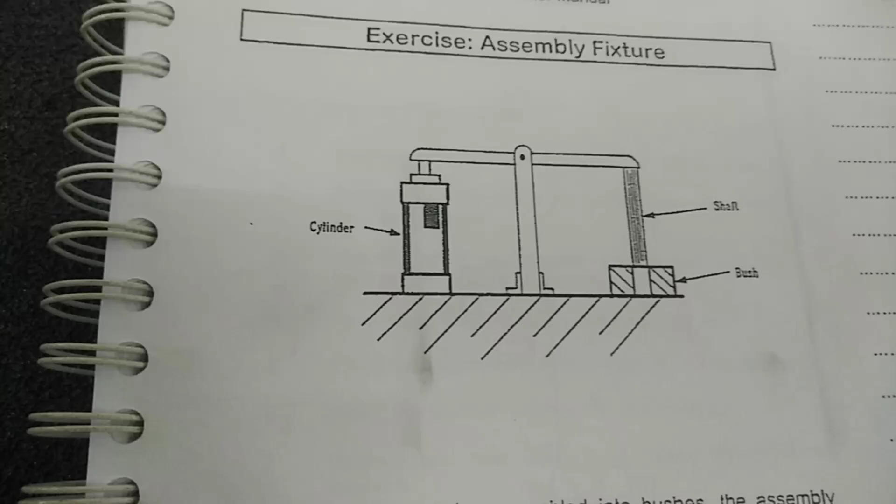This first experiment is about the use of a pneumatic control trainer for an assembly fixture. The purpose of this experiment is the insertion of spline shafts into the bushes.

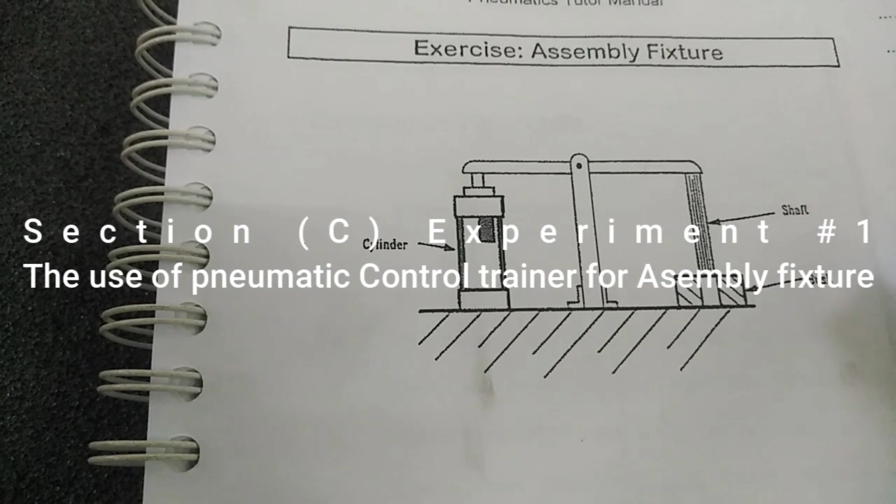This assembly requires a press fit. The meaning of this press fit is the case in which one part is forced under pressure into a slightly smaller hole in the other part. A spline shaft is a shaft in which a number of equally spaced grooves are cut into it.

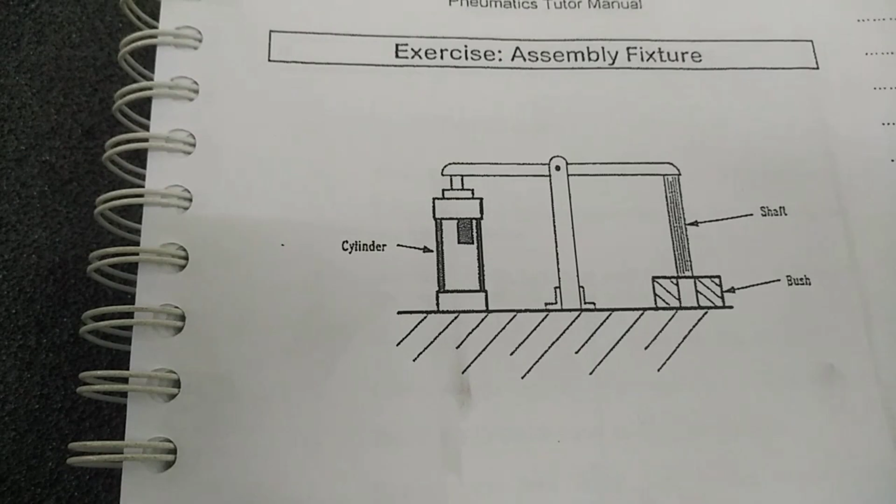For this purpose, these shafts are placed manually into the bush, and a push button is then actuated to extend a single acting cylinder through a linkage. As the cylinder extends, the shaft is pressed home. As the push button is released, the cylinder is retracted back to its initial position.

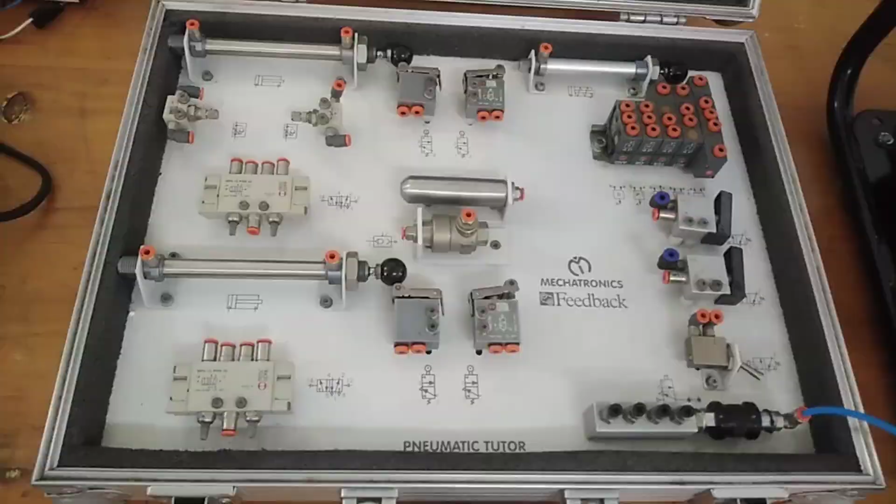To perform this experiment, we need one single acting cylinder, one 3x2 way push button operated spring return directional control valve, one port of the distribution manifold, and 4mm pneumatic tubings.

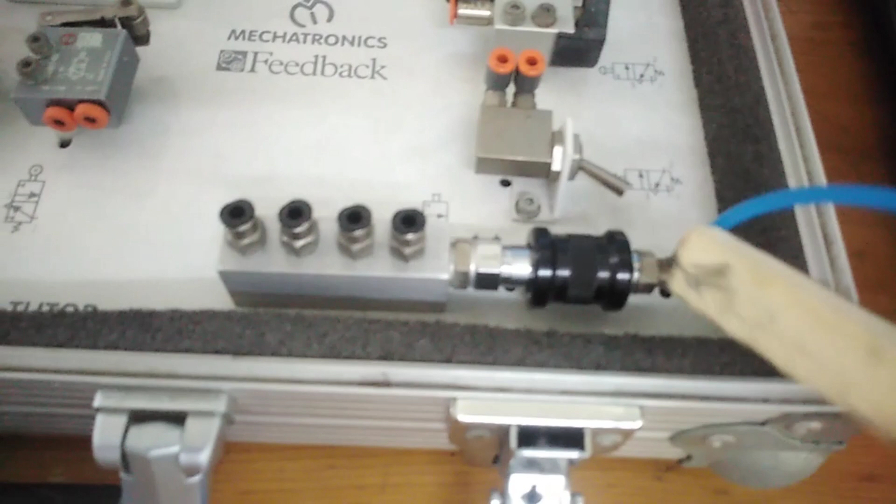First of all, ensure that the hand slide valve is in the off position. Then connect the tubes as per the circuit given in the experiment. Now perform the experiment as per the operational procedure given in the experiment.

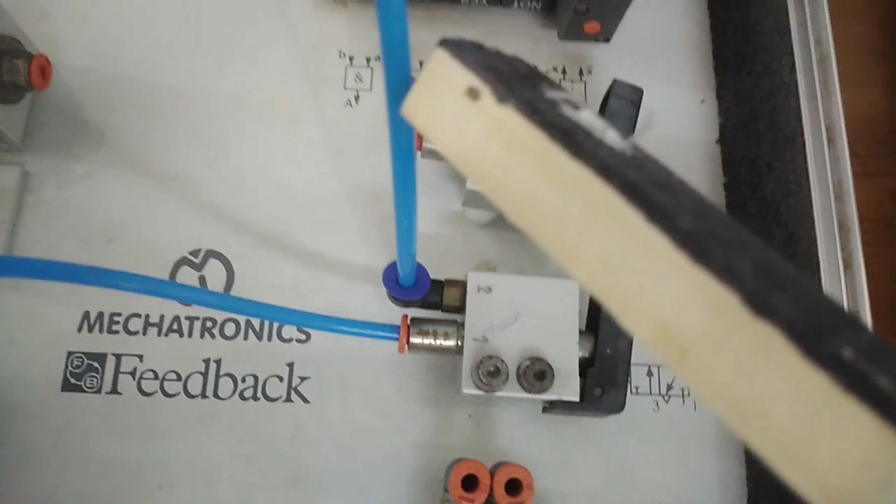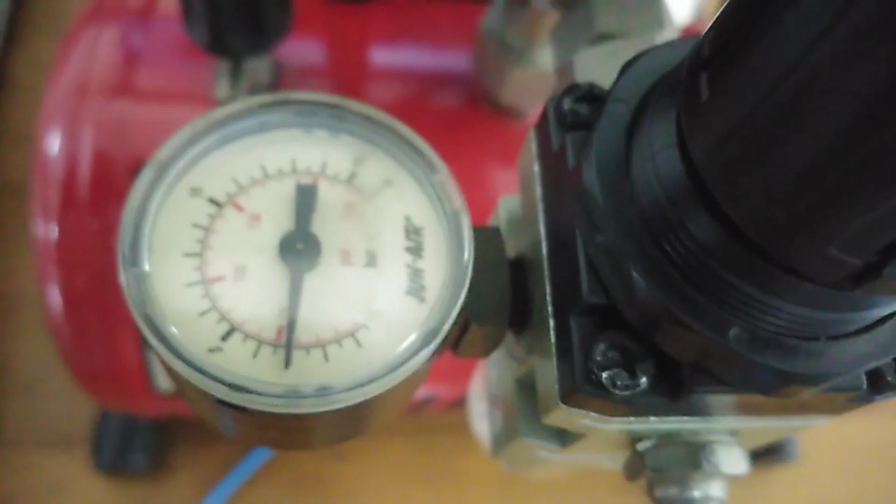Open the supply of the compressed air, and the operation will be performed between 3 to 5 bar. Now move the hand slide valve button to the on position.

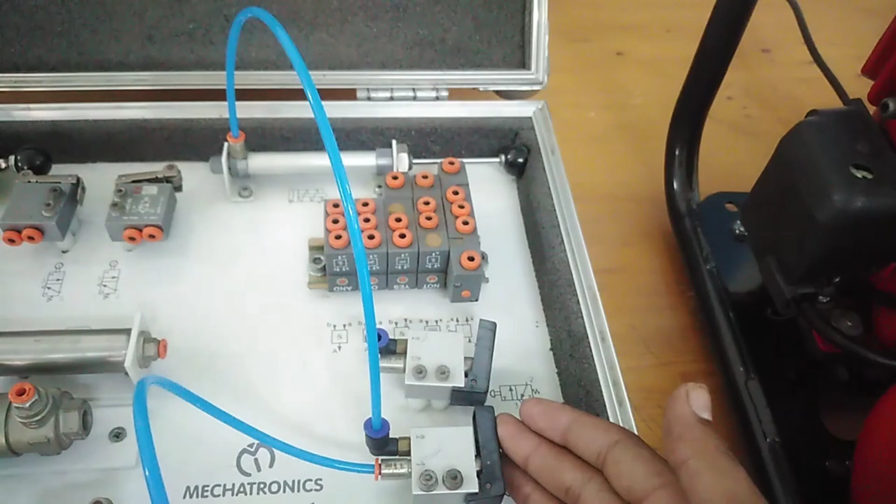Operate and hold down the push button and observe what happens. Release the push button and again observe what happens. Compare your observations with the written circuit explanation.